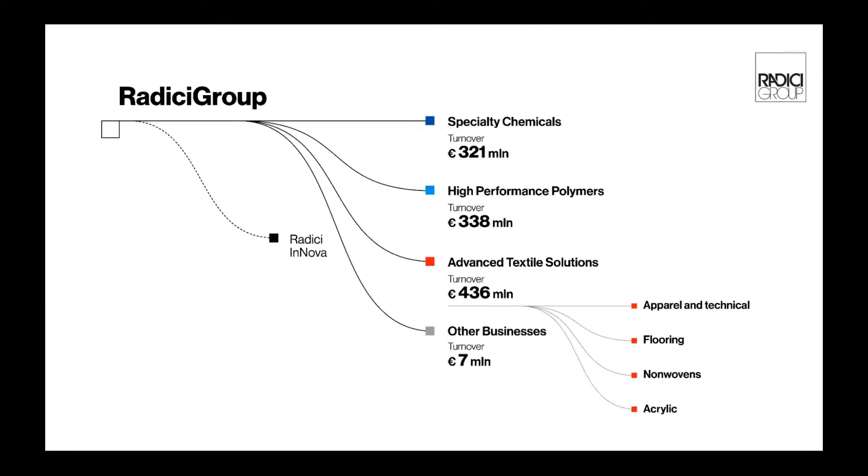RadiciGroup is an Italian company specialized in the production of chemicals, high-performance polymers, and advanced textile solutions. RadiciGroup offers a wide range of products developed to meet the needs of specific application markets. The turnover of the group related to the year 2020 is about 1 billion euros, with 3,000 employees. We are present worldwide by industrial and sales network in Europe, Americas, and Asia.

As RadiciGroup High Performance Polymers, we can offer a complete range of materials, even special tailor-made products, thanks to our upstream integration of polyamide 6, polyamide 6,6, polyamide 610, polyamide 612, and copolymers. With people's expertise and qualified support, Radici offers continuous innovation, development, and sustainability along the entire production chain.

As mentioned before, RadiciGroup High Performance Polymers, thanks to the upstream integration, has a wide range of polyamide-based products, and to support complementarity in the material portfolio, RadiciGroup also has compounds based on polyphthalamide, polyphenylene sulfide, and polyester. Confirming our commitment to sustainability, recycled materials with post-industrial and post-consumer origin are produced and offered to customers. We are present with our material brands in various markets: automotive, electrical and electronic, and consumer and industrial goods.

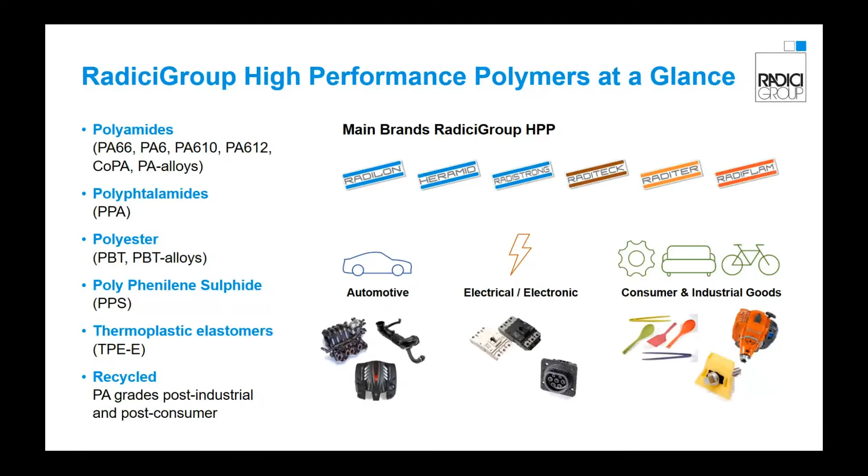Our focus is on innovation and sustainability, and this leads us to research for materials performance in different challenging fields. In metal replacement, where we can offer special ultraflow PA6 and PA66 with high glass content. These materials show high mechanical properties, and they are suitable for structural demanding applications.

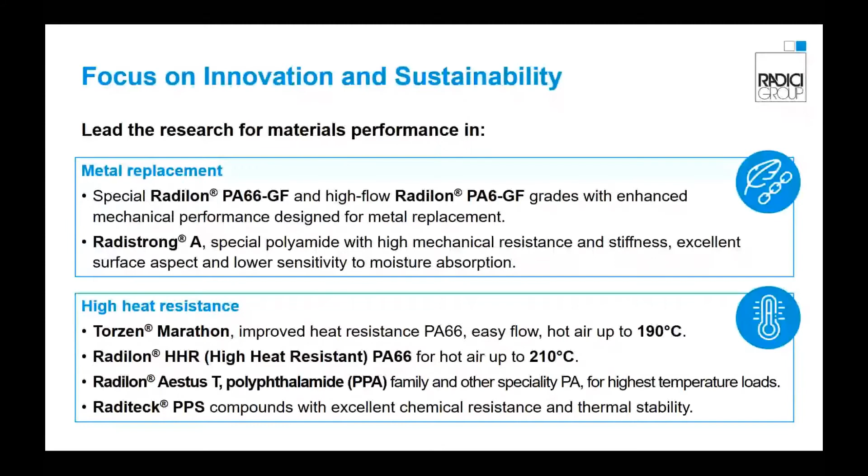Long-chain polyamide, where we have materials partially bio-based with enhanced chemical resistance, intended for use in contact with aggressive substances. We are also focused on high heat resistance formulations, aimed to extend the limits of applications in terms of heat and temperature. And finally, facing the challenge of vehicle electrification, we are present with materials specifically developed for the e-mobility sector and its demanding requests.

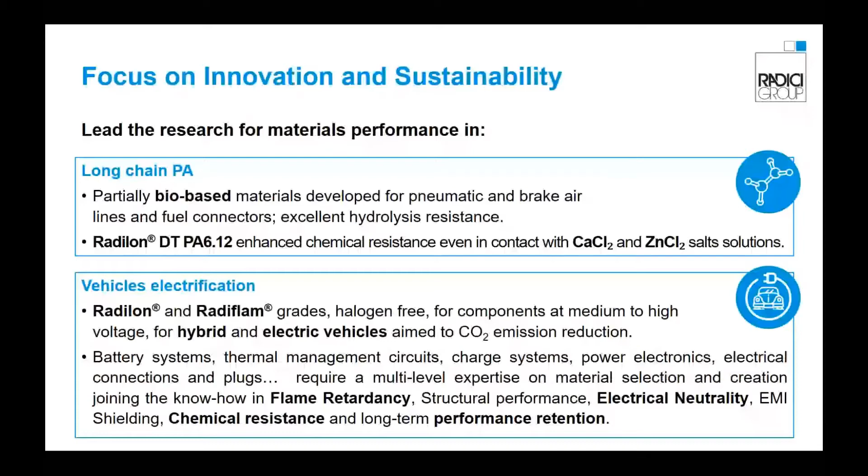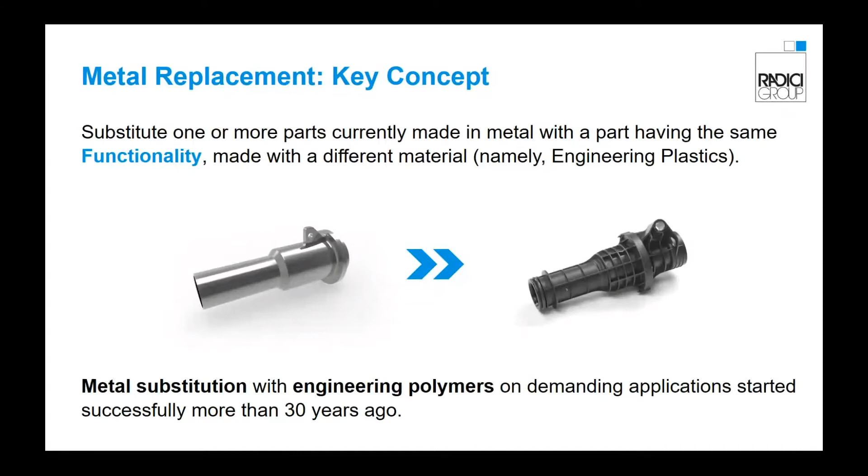So, metal replacement is technologically challenging, but what exactly does it mean and what are the advantages from its use? Let's see it together. The meaning of metal replacement is contained within the word itself: it's the substitution of one or more parts currently made in metal with a part having the same functionality, made with a different material, namely engineering plastics. Metal substitution with engineering polymers on demanding applications has a successful long history, and it started more than 30 years ago. However, today it is an actual theme, and it's becoming a more and more challenging field, but with some larger leeway regarding its use.

Indeed, there are still great opportunities in all markets, where there are several components which are not yet being considered for metal replacement. The macro drivers for the usage of engineering polymers in innovative products are reduction of production cost. As we will see, there are some benefits given by the reduction of some post-processing phases, for example machining, painting, but not only. Indeed, the investments are also lower compared with the production of metallic parts.

Lower environmental impact of the products: considering the life cycle assessment, a component made in plastic generally has a lower carbon footprint compared with the steel-made one, thanks to the lower CO2 emission during the entire product life.

Lightweighting, in particular for the automotive and transportation sector, where new regulations on CO2 emission limits lead to lighter vehicles in order to reduce, for internal combustion engines, the fuel consumption and consequently the emission of CO2. This concept can also be used for electric vehicles in order to increase the range extending.

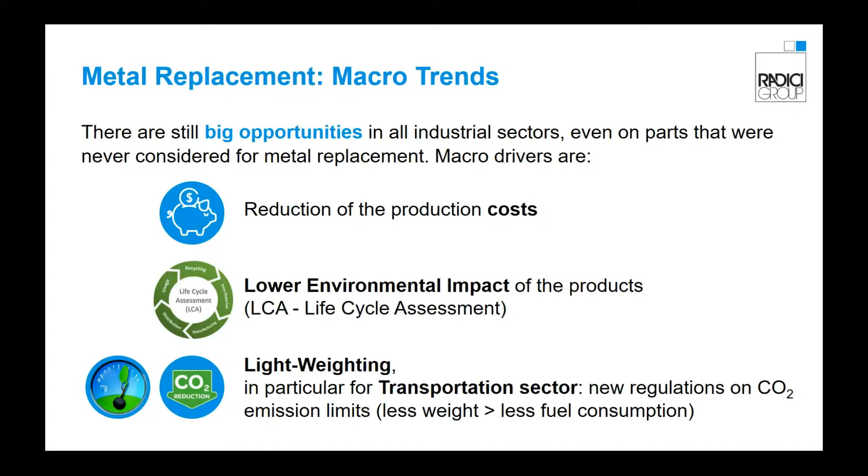We talked about the advantages coming from metal substitution. Now we will see them in depth.

First of all, weight reduction, engineering polymers have a lower density compared to aluminum or steel, so lighter material, lighter parts. We have a certain freedom in shape or design of parts, using also complex geometry features.

As we said previously, metal substitution gives a good impact on environmental sustainability. From the aesthetic point of view, parts made with engineering polymers have a very good aspect and can be produced in various colors without painting, since the granules of material are dyed in mass.

Last but not least, the use of engineering polymers allows a lower cost of the part, thanks to the reduction of assembly and post-processing phases. Benefits also come from higher productivity, lower cost of process technology, and longer tool life compared with die casting and molding.

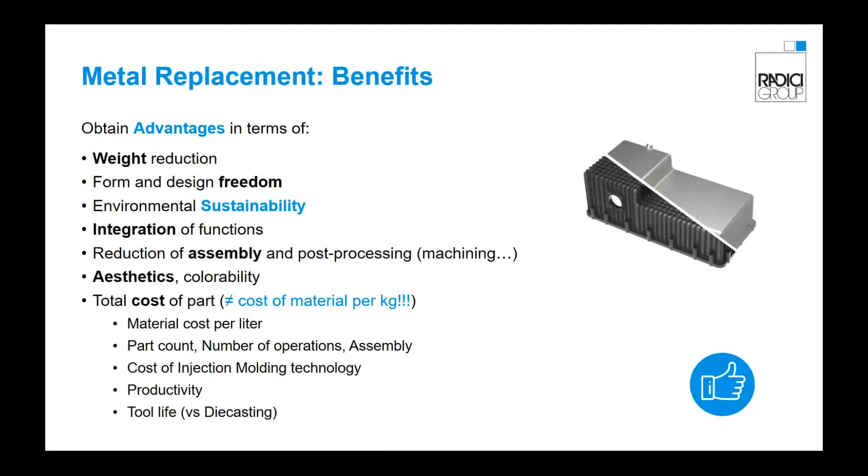Radici Group, as a material supplier, has in its material portfolio a wide range of engineering polymers that are specifically developed for metal replacement projects. Let's take a look.

Our Radilon brand contains a series of various types of polyamides, starting from polyamide 6 and polyamide 6,6 up to the long chain polyamides, and then polyphthalamide.

Radilon S URV 500W and S URV 600W are compounds based on polyamide 6 with a high glass content and are suitable for products which require high productivity along with very high stiffness and high mechanical strength.

Compounds based on polyamide 6,6 with 35 or 50% glass fiber can be used for structural parts that require high stiffness and high mechanical resistance. These materials are suitable, for example, for parts like oil pumps, engine supports, and turbo air ducts.

Based on polyamide 6,6 polymer, we have the HHR material family, which can be used in applications where we have continuous use temperature with hot air up to 210 degrees.

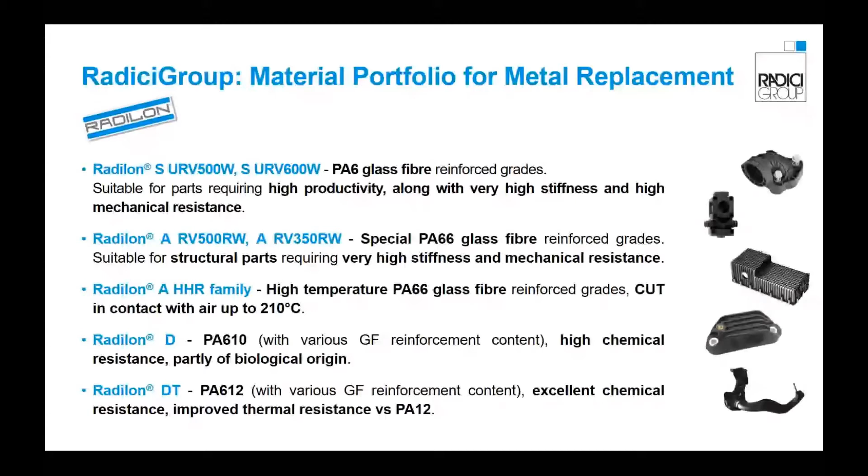Under the brand Radilon, we can also offer compounds based on polyphthalamide that show superior hydrolysis and chemical resistance along with a high melting point. PPA materials are suitable for structural parts requiring high stiffness and mechanical resistance.

Radistrong brand contains special polyamide 6,6 glass fiber reinforced grades, which show lower moisture sensitivity. These grades are suitable for structural parts requiring high mechanical properties and superior surface aspect.

Raditeck is the brand of compounds based on PPS polymer, and these grades show a balanced matching of superior chemical resistance, superior dimensional stability, and inherent flame retardancy property.

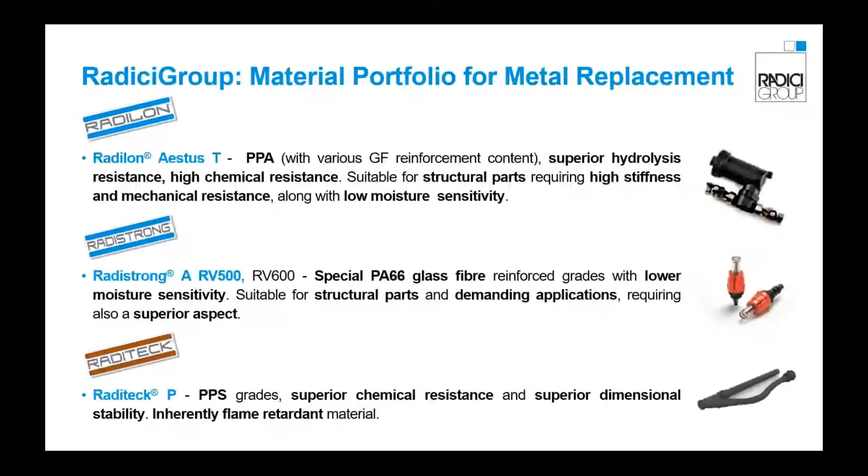Radiflam is our brand for compounds based on polyamide 6, polyamide 6,6, polyphthalamide, and polyester with flame retardant fillers, which are intended for use in parts in the electrical and electronic market, like terminal blocks or switch connectors.

In the last period, due to the growth of vehicle electrification, special grades have been specifically developed for use in the e-mobility sector. For example, Radiflam A RV250HF, which is a PA66 with 25% glass fiber, halogen and phosphorus free, suitable for parts requiring fire retardancy along with medium stiffness and good mechanical resistance.

Typical applications are charger plug connectors and cell holder housings.

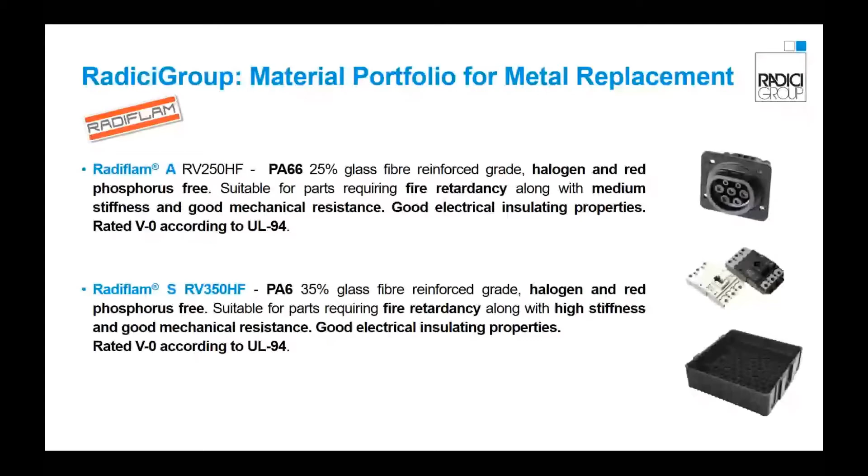After the material portfolio presentation, I will take a look at the design approach with engineering polymers, considering the peculiarities of these materials. First of all, it is good to resume the key concept of the metal replacement.

The replacement of metal with engineering plastics is done with a part that has the same functionality. It doesn't mean making the part in plastic while assuring the same properties, because plastic is not metal. So we are committed to think about how to take advantage of plastic's peculiarities.

A correct approach to metal replacement must be taken into due consideration from the very beginning stages: the functional requirements of the parts, including the implicit ones, and the way it interacts with other parts and the operating environment. The intrinsic properties of plastics, which compared to metal are strongly different, must be taken into account where we are in the design phase.

So it is necessary to have an overall view of all these aspects related to the project, to pre-select the material and then to redesign the part.

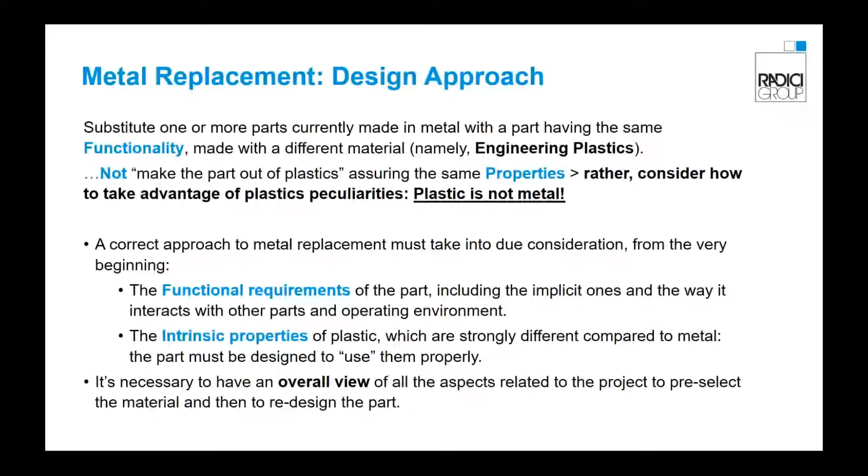As is well known, reinforced plastic, compared to metals, shows fundamental differences in properties. As we can see from the Ashby chart, the stiffness of plastic is 10 times lower than metals, but at the same time, the density can be 1.5 to 10 times lower.

We also have a totally different mechanical behavior with temperature. Indeed, metals have an influence on properties only at a certain level of temperature, generally high. So the substitution implies a deep redesign of the part, which must be made for plastic according to its properties.

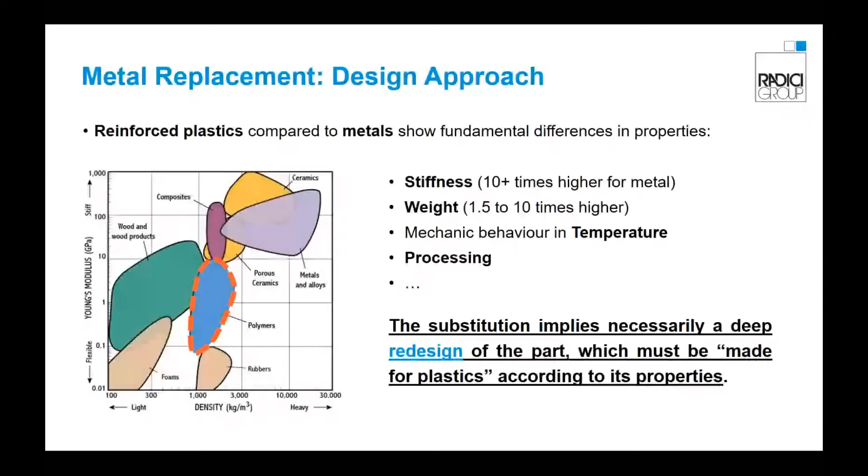We say that metals are 5 to 20 times stiffer than reinforced plastics.

As we can see from this table, the elastic modulus of steel is quite higher compared to the modulus of polyamide 6,6 with 50% glass fiber. Because of this, a part in metal, if made in plastic with identical geometry, will likely result in being too flexible, and premature breaks may occur.

In order to ensure the mechanical performance of the part, it is fundamental to increase the flexural and torsional stiffness by acting on these parameters: for example, increasing the thickness, increasing the material modulus by increasing the fiber content or using a different type of reinforcement, or increasing the moment of inertia by optimization of the section geometry.

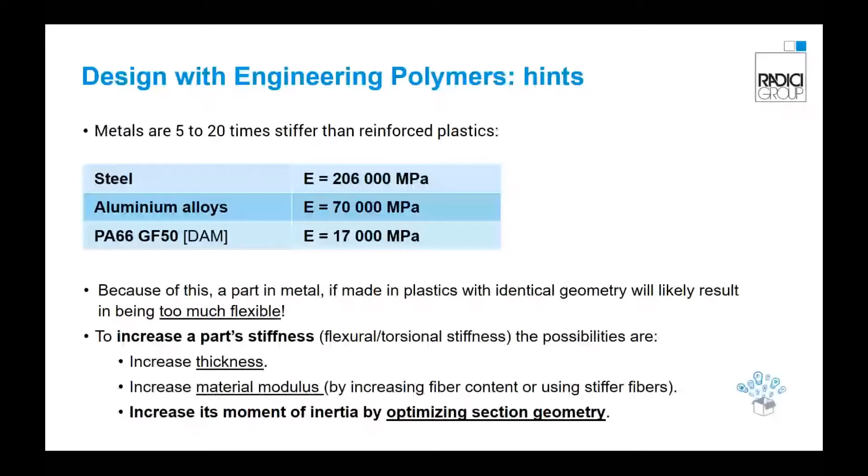Here are some hints on how to approach the design with engineering polymers. First, we take a look at the part's thickness. Thickness should be high enough to ensure required stiffness and mechanical strength of the part, but also, from the process point of view, to ensure proper resin flowability and cavity filling.

At the same time, thickness should be low enough to ensure low shrinkage, good aesthetics, moderate cycle time, and minimum part weight and cost. As a general rule, thickness should be as low as possible, provided that moldability and structural performances are guaranteed.

Another important aspect is to design the part with thickness as uniform as possible throughout the part, in order to avoid differential shrinkage during the molding process.

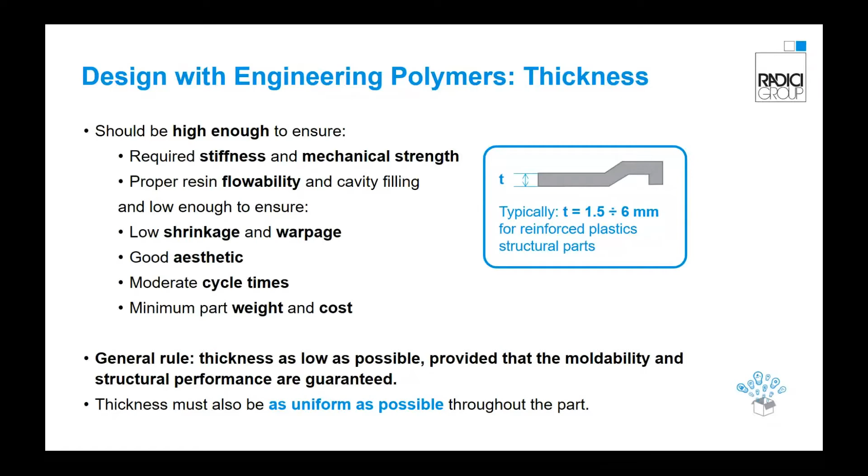Typically, the thickness of plastic parts for structural applications ranges from 1.5 to 6 millimeters.

Ribs are used in order to increase the moment of inertia and thus the flexural stiffness in a specified direction. It's very interesting that increasing the height of the section increases part stiffness with a third power factor. A properly designed rib pattern, as we can see from the pictures on the right, gives optimal reinforcement in many possible bending and twisting directions to which the part can be submitted, with only a minimal material increase.

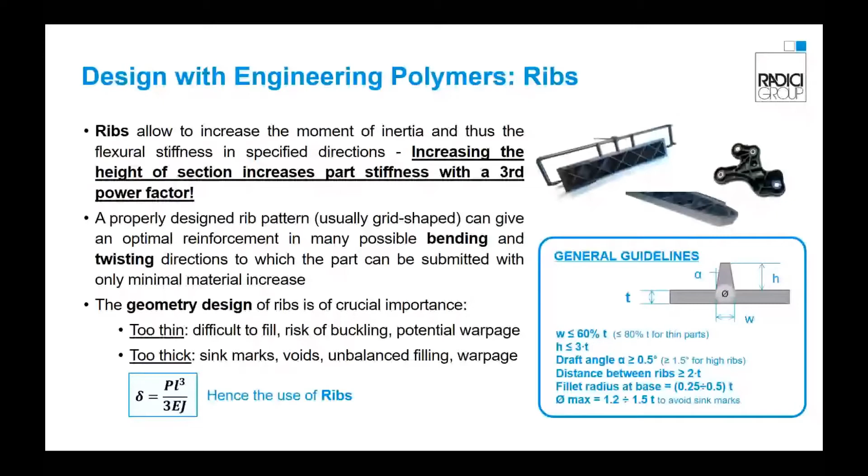Geometry of the ribs has crucial importance. Thin ribs are difficult to fill, and the risk of buckling and potential warpage are present. At the same time, thick ribs lead to sink marks, voids, and unbalanced filling. Hence, use the general guidelines reported in the picture on the right, in order to ensure the right part stiffness along with a good injection molding process of the parts.

Another thing to avoid in the design with engineering polymers is strong geometry discontinuities or sharp edges. For reinforced plastics material, geometry discontinuities cause differential shrinkage, warpage, and mold filling defects. And when the parts are subjected to a load, these sharp edges, particularly internal ones, cause stress concentration and then high risk of premature part breaking.

Hence the use of fillets in order to avoid these geometric discontinuities.

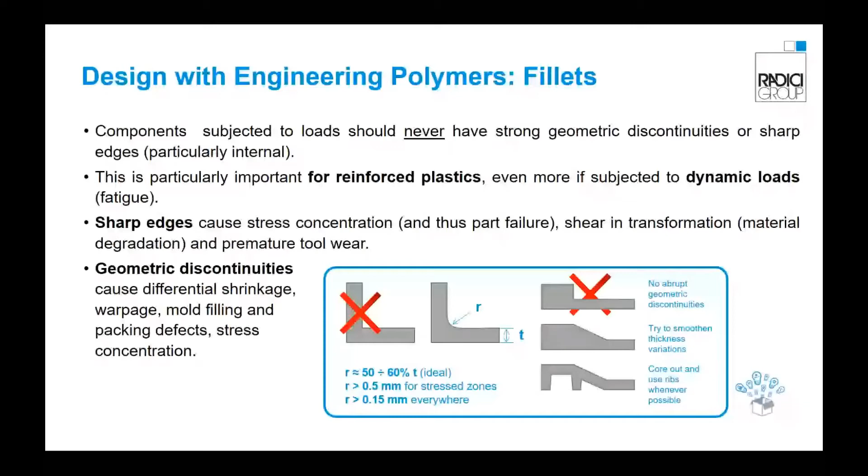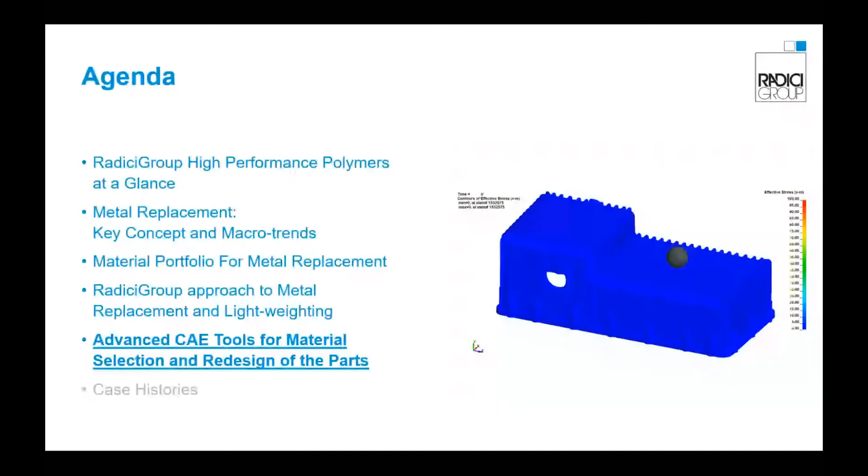Now we are going to have a look at the CAE tools available in RadiciGroup High Performance Polymers, which are aimed to support customers for advanced metal replacement projects.

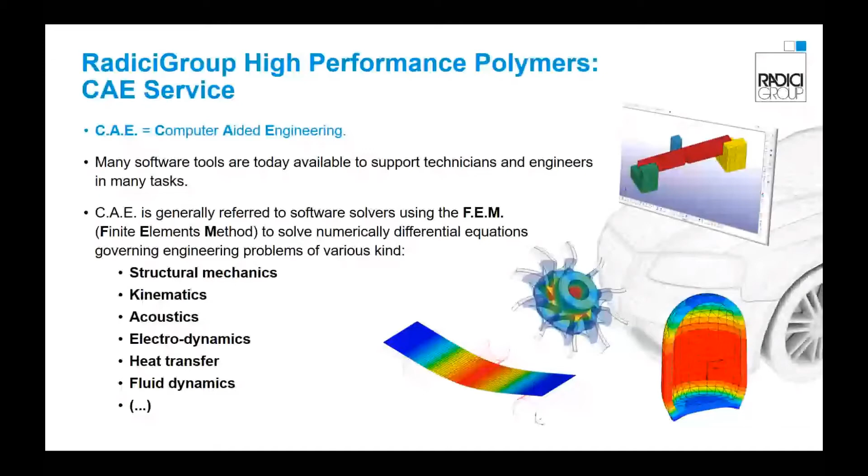First of all, what CAE means: CAE is the acronym of Computer-Aided Engineering, and includes many software tools that support engineers using FEM, the finite element method, to solve technical problems numerically in different fields: structural mechanics, electrodynamics, heat transfer, fluid dynamics, and so on.

Metal replacement can require multiple steps of analysis and modification of design before reaching a confidence level to confirm its feasibility. RadiciGroup High Performance Polymers has a long history in metal replacement projects and can provide to the customer its expertise for these innovative projects through a free-of-charge service that includes process and structural simulation in order to perform a material and design assessment and therefore the part validation.

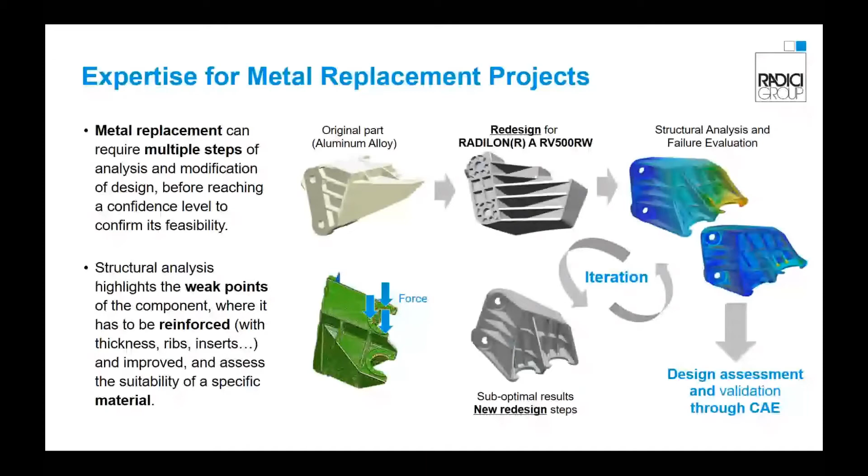Indeed, RadiciGroup High Performance Polymers has internally a CAE department with different available software. In particular, we are able to perform process simulation in order to predict the behavior of the material during the injection molding and derived technologies.

We are able, with structural simulation, both static and dynamic, to foresee the mechanical behavior of the parts made in thermoplastic material when subjected to a design load. The last but not least main field is related to what we call the integrated approach, an advanced method to take into account the process-induced microstructural properties, like glass fiber orientation, in a structural analysis.

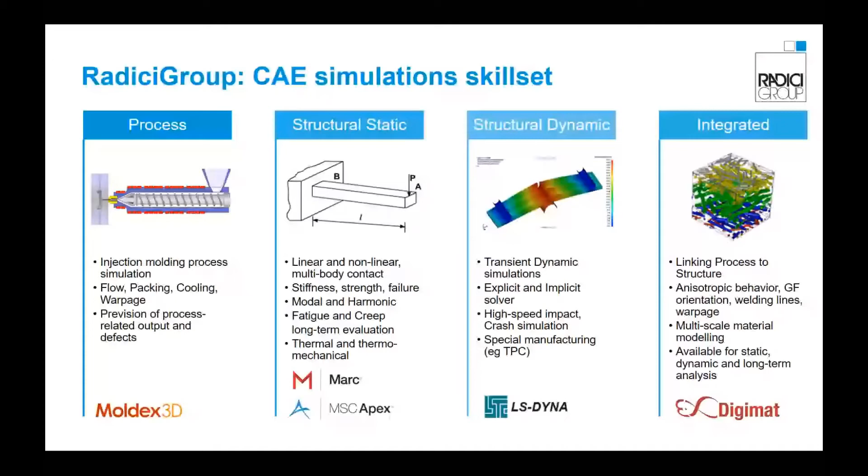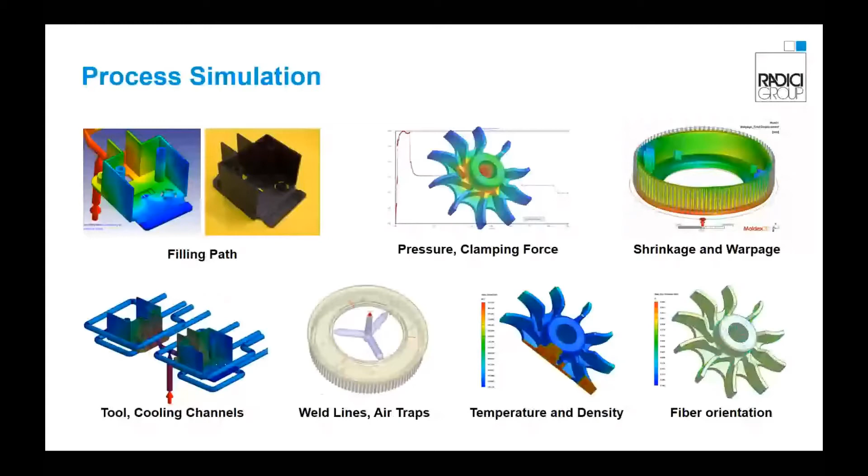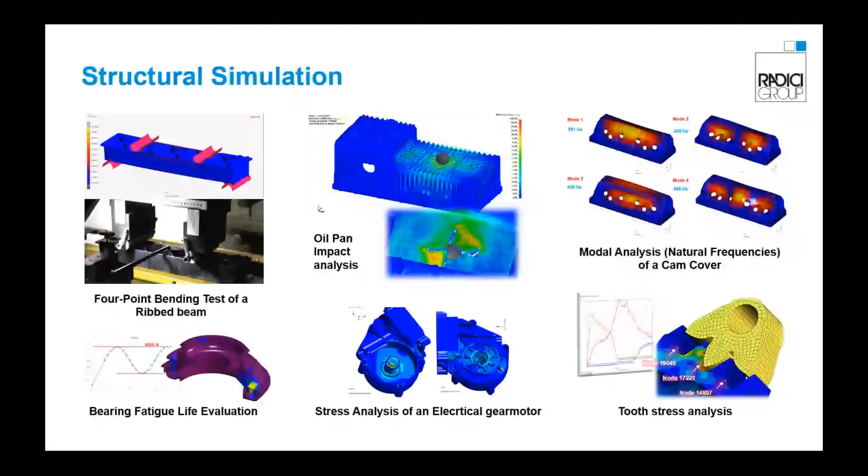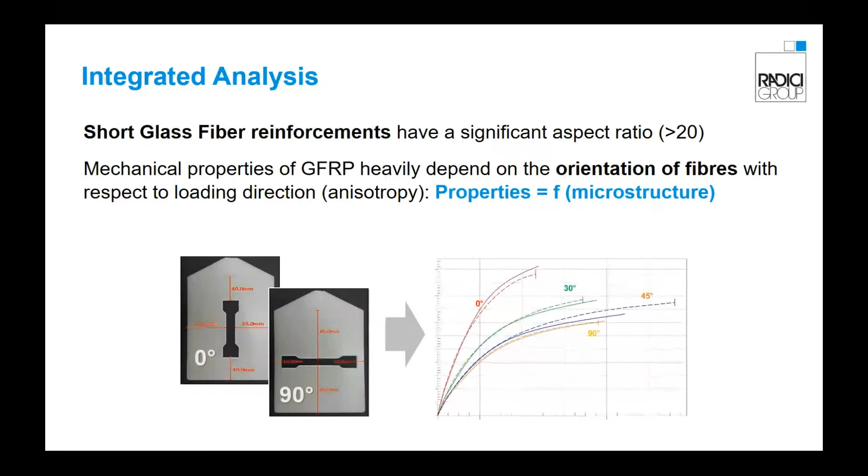In conclusion, we can say that the properties are a function of microstructure. But the orientation is a consequence of the phenomena which occur during the mold filling phase, thus related to the part geometry and the transformation process. So the microstructure is a function of the process.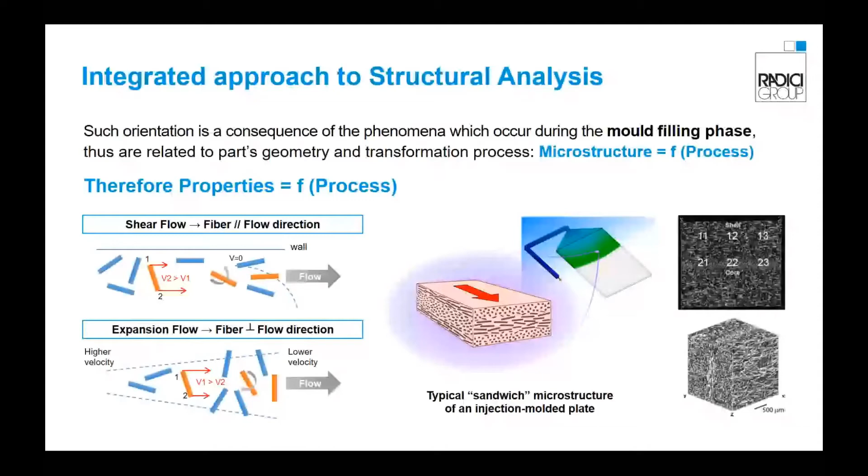The integrated approach to structural analysis takes into account the process-induced properties in the structural simulation, giving higher accuracy and reliability in predicting elasticity and failure of the parts. Practically, outputs coming from the process simulation, such as fiber orientation, welding lines, residual stresses, and warpage, are mapped onto a structural model with dedicated software.

Then structural simulation takes into account, for each point of the part, a specific mechanical response. This leads to a more in-depth understanding of the material behavior and consequently to the reduction of over-engineering and the use of high safety factors.

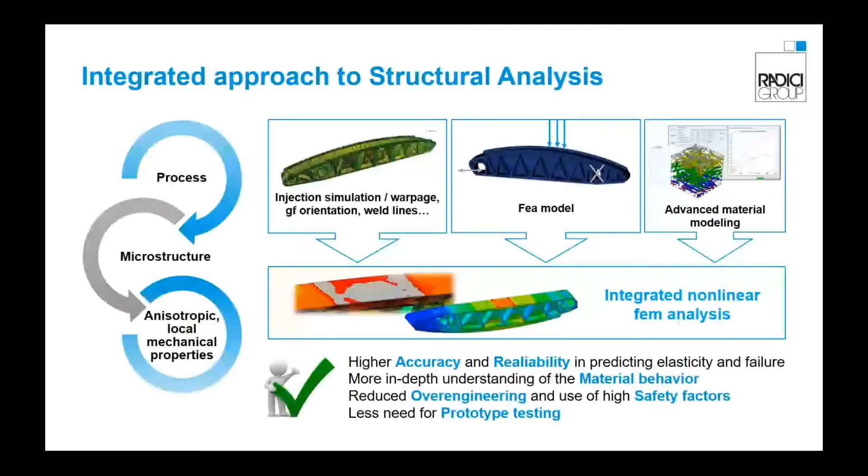Another term which is often heard is eco-design. In practice, this means applying CAE technologies to emphasize some good design and manufacturing practices, which have also positive effects, direct or indirect, in terms of sustainability and environment. Some of them you can see in this slide.

Let me just mention design for disassembly, a topic which will become more important with the rise of circular economy trends. Facilitating dismantling and the recovery of end-of-life parts is fundamental in this sense. Reducing trial and error and physical prototyping is also important. Also, optimizing a component's shape or exploring different alternative solutions can easily lead to discovering the most virtuous way to perform a task.

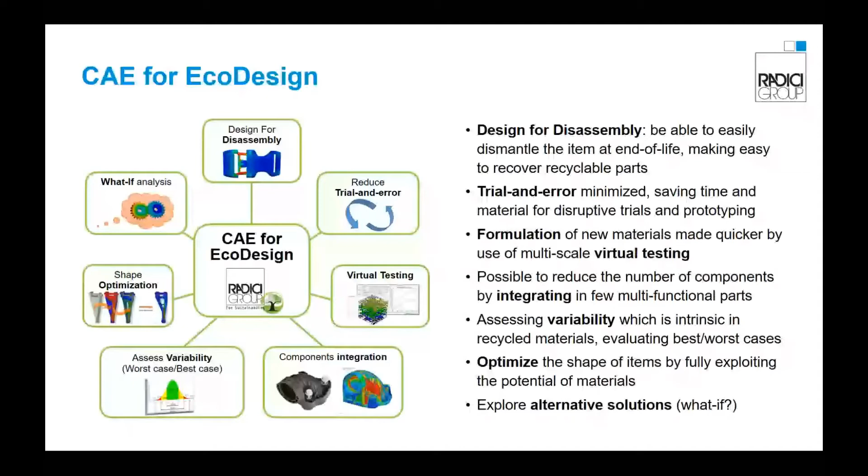At this point, we have seen how to approach metal replacement from the material and design point of view. Now it's time to see some successful metal replacement projects where material and expertise of the Radici Group were involved.

For another customer operating in the automotive market, we, as Radici Group, were involved in a metal replacement project of an oil circuit valve body and relative elbow, which were previously made with aluminum alloy. Our proposal was a polyamide 6 with 35% glass fiber, a material suitable for prolonged contact with hot air and motor oil, with excellent fatigue resistance.

The requirements of this application were quite demanding in terms of temperature exposure, as well as fatigue and dynamic resistance of the material. We were able to provide the customer design support in order to assess and validate the parts through simulation tools. This project was successful, and now the parts are in serial production.

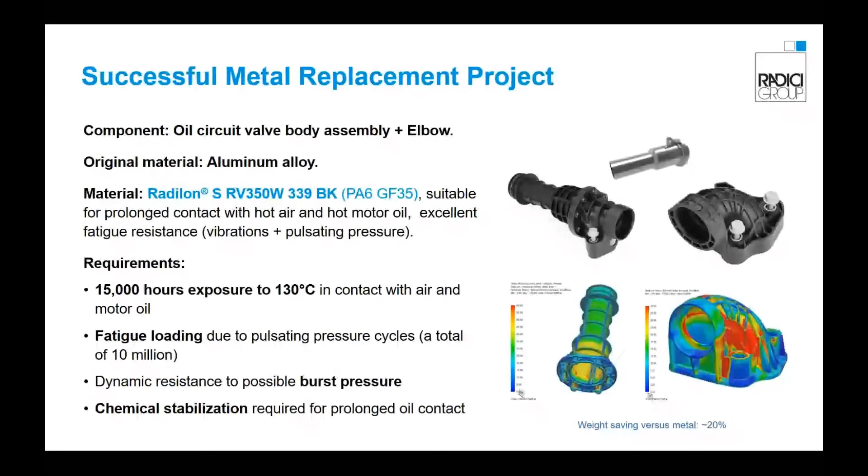For another automotive customer, we were involved in a metal replacement project of a battery support, which was previously made in steel. The material proposed for this application was a polyamide 6.6 with 50% of glass fiber. This grade has a superior thermal stabilization in order to meet the continuous temperature exposure of the part. And this grade shows very high mechanical properties. The requirements for this part were high stiffness and high strength, along with high creep and fatigue resistance.

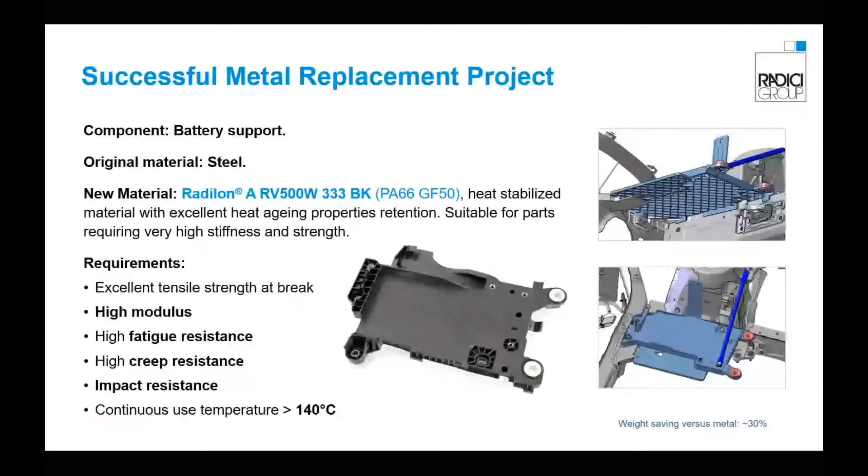This is another successful metal replacement project on a diesel engine cam cover. The original material for this application was aluminum alloy, and RadiciGroup was able to support the customer, providing a dedicated CAE service and a material solution. The proposal from our side was a polyamide 66 with 35% of glass fiber, with high stiffness and good mechanical resistance, and excellent heat aging properties retention. Requirements also in this case were high mechanical properties, fatigue, and creep resistance, as well as continuous use in temperature.

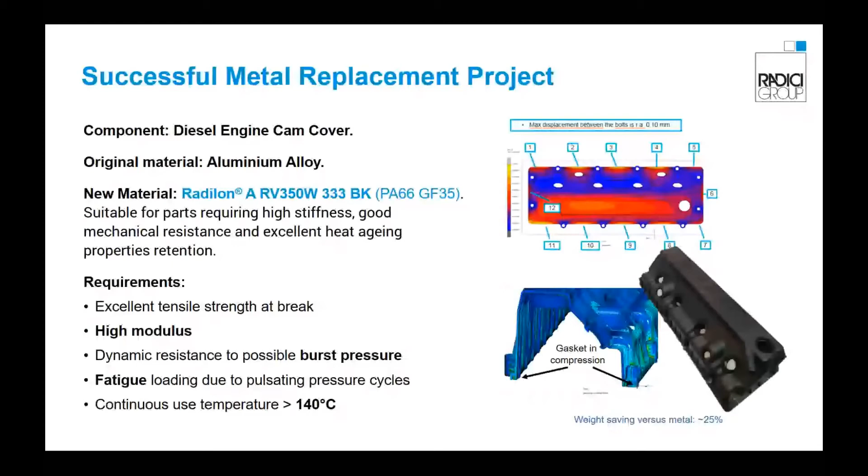For a customer operating in the water management sector, we were involved in a metal replacement project where a water meter diaphragm was redesigned and then validated through our CAE tools in order to substitute the original material, cast iron, with a polyamide 612 with 30% of glass fiber. This material is suitable for parts requiring high stiffness and high mechanical strength, and shows excellent dimensional stability and chemical resistance. Also in this case, the requirements for this application were quite severe. In particular, the fatigue and creep resistance, which were assessed through a structural simulation.

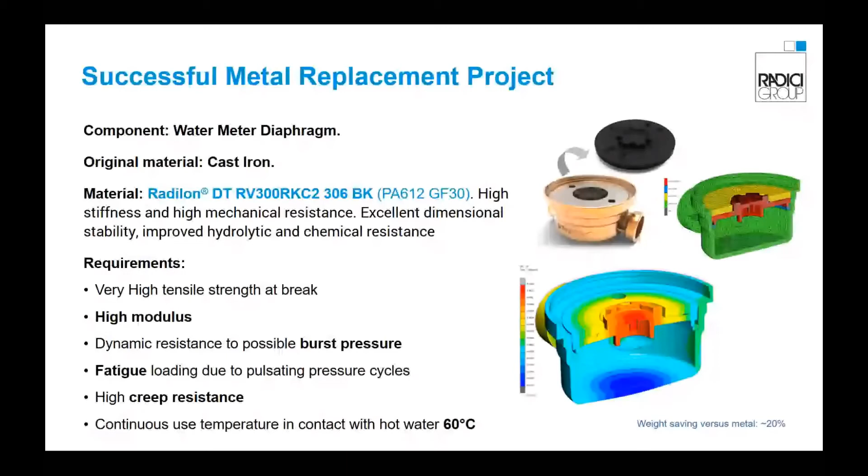We are about to face the last slide of the presentation, and I want to remark on how RadiciGroup High Performance Polymers can be more than a material supplier, and rely on a global team, including technical marketing, application development, and R&D to provide professional support throughout all project phases. Starting from the proposing and consulting in the early stages, then the material selection and the CAE validation, up to prototyping and scale-up phases, with technical service support at molding trials and parts testing.